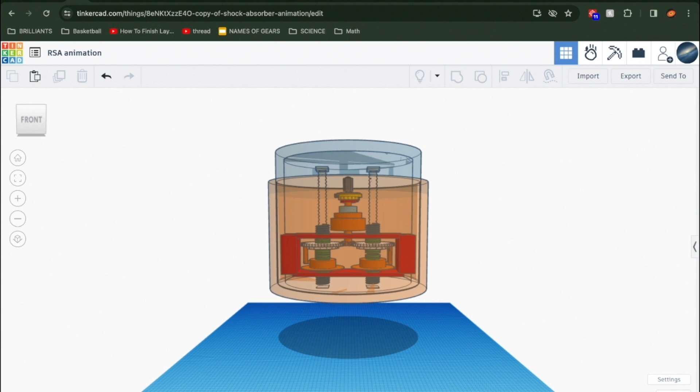Our innovation is our flywheel regenerative shock absorber to recover wasted energy in car suspension systems.

Because energy demand is expected to increase 44%, sending us into ecological overshoot, we brainstormed a couple of current things people were doing to combat this. The first thing was electric vehicles. EV vehicles are a huge combatant to the climate change issue because they decrease the amount of CO2 emitted.

However, what we wondered was why we did not see EV vehicles being driven around everywhere, and why we still saw many gas vehicles. Upon further research, we found that EV vehicles have a much lower mileage than conventional diesel vehicles, disincentivizing them for consumers.

We asked owners of electric vehicles and people without EVs what issues they found in EVs or what prevented them from buying an EV. We found that for people who already had EVs, the biggest stress was planning a route which allowed them to stop by an adequate number of charging stations. For those who had a gas car, they did not want to make the transition to an EV vehicle because of their lower mileage and lack of charging stations near them.

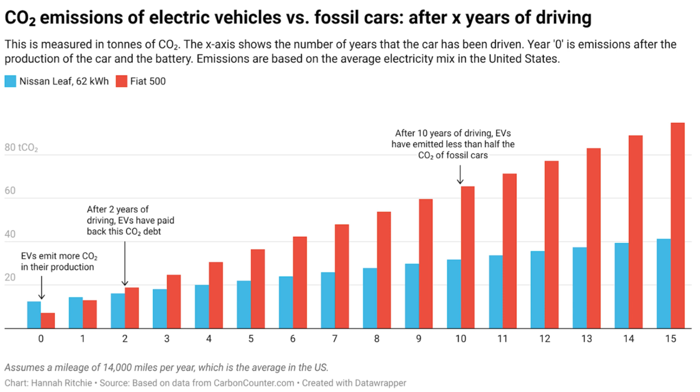In addition, we found that EVs were bad for the environment because of the amount of CO2 produced when generating the electricity for the car to run. This is of course less than the impact of gas vehicles, however, this still limits their impact on the climate change crisis. Therefore, we brainstormed ways which we could extend vehicle mileage by regenerating electricity and putting it back into the car battery, increasing the mileage of the car and incentivizing consumers, while also decreasing the need for the car to be charged so often, decreasing its CO2 output.

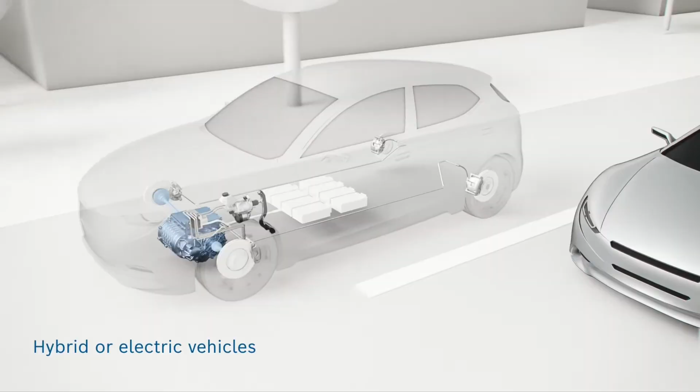The first thing we found that people have been doing was that they have employed regenerative braking to capture electricity. How regenerative braking works is it captures the energy used to stop the car and causes it to brake and transfers that into electrical energy to charge a generator to charge the battery.

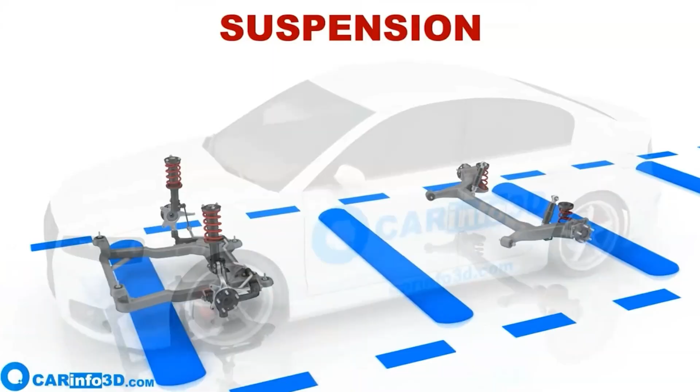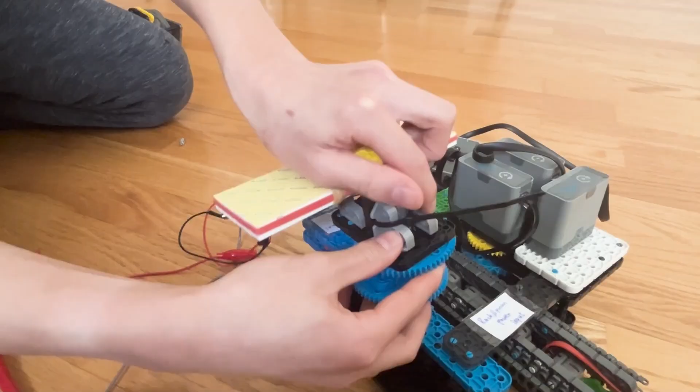Therefore, we looked at other parts of the car and noticed that the suspension system moves a lot when the vehicle is driving, allowing us to tap into that resource and be able to generate electricity. After this, we made a simple model of VexIQ pieces and tested to see what voltage we were outputting. We used a simple rack and pinion mechanism to convert the linear motion of the suspension moving up and down into rotational motion to spin the generator.

During testing, we found that the energy output was limited because of the fact that the system only generated electricity on the way down, not on the way up.

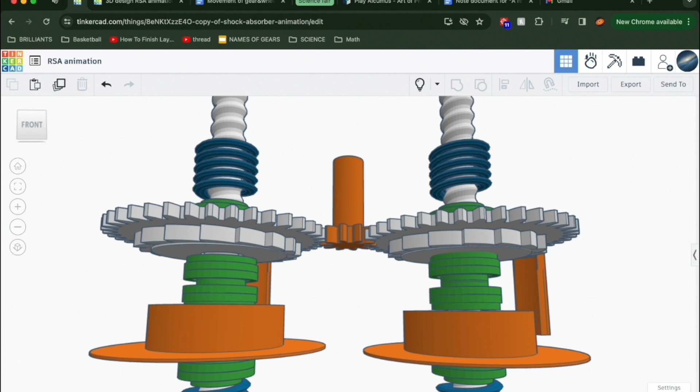Therefore, we created our novel double clutch mechanism, which generated electricity when the suspension system is compressed and when it's relieved. It uses a ratchet and pawl mechanism arranged in a certain way to allow for this to happen. When the system is compressed, the right pawl engages, spinning the system clockwise while the left pawl just clicks. However, when the system is released, the left pawl engages, spinning the system clockwise while the right pawl just clicks. Because of this, we're able to double the energy output, spinning the system clockwise when the system is compressed and released. The second thing we noticed was that when our shock absorber wasn't moving, it wasn't generating electricity.

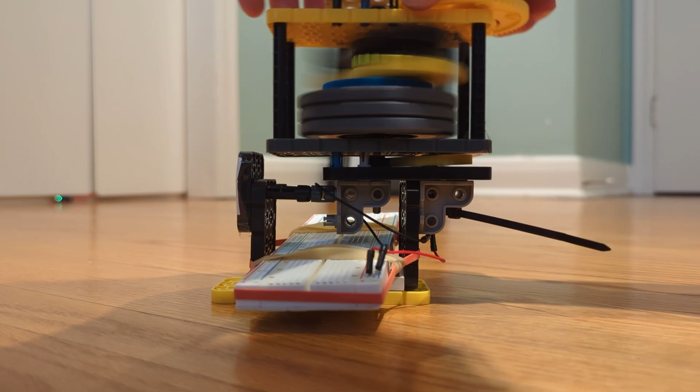We took inspiration from flywheel batteries and salad spinners and added a flywheel to continue to generate electricity even after the system was stagnant. After testing the system with no flywheel and with a flywheel, we found that the flywheel achieved almost double the amount of electricity than the non-flywheel system.

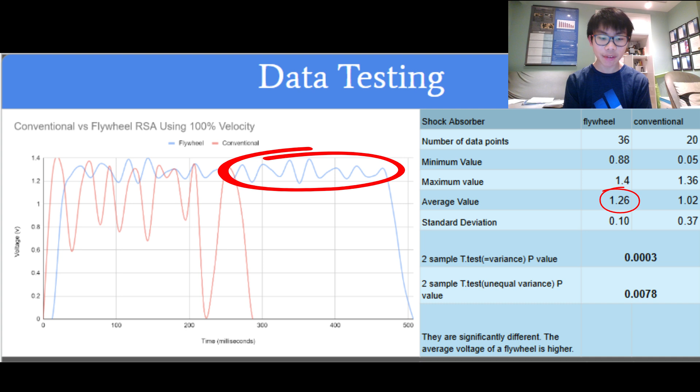We also see that the flywheel continues to generate electricity even after the system has stopped, evident in the fact that the flywheel line is longer. We see that the flywheel system has a higher average and lower standard deviation compared to the non-flywheel. This trend continues through the 80 and 60% inputs.

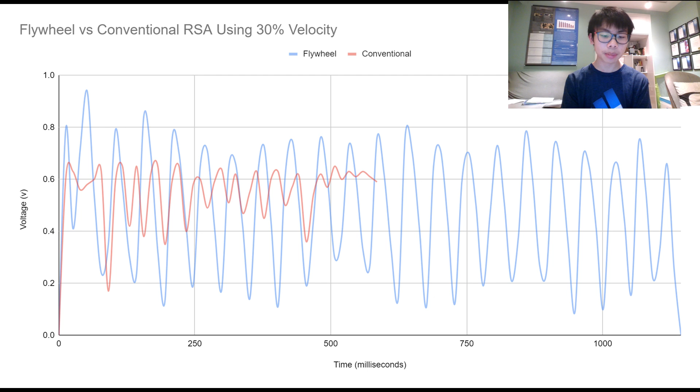However, at the end, at the 30% input, we see the trends have flipped, with the conventional system being more stable while the flywheel fluctuates. This is because there's not enough input force in order to get the huge weight of the flywheel going. What we found was that the flywheel performed much better than the conventional system when they were being spun faster, as opposed to when they were being spun slower. The sweet spot is when the system was spun between 100 to 60%. After that, the no flywheel system is better.

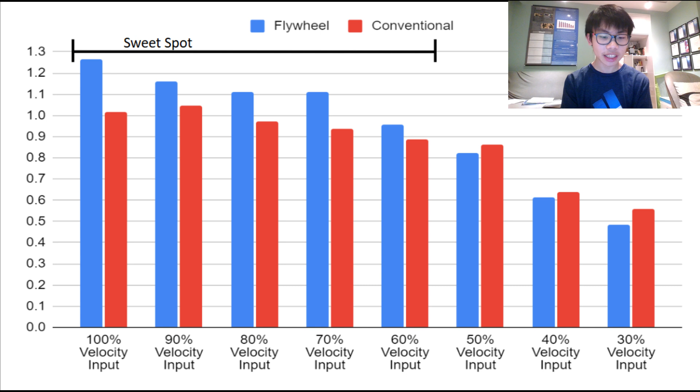Therefore, we needed to find a way to keep it in that 100 to 60% range.

Our next step was to 3D print an actual prototype which we could test further. We CAD'd our initial idea on Fusion 360 and began doing test prints. Naturally, some things did not work out, and we needed to print a lot of things. However, once we got everything to fit together, it seemed like it might work.

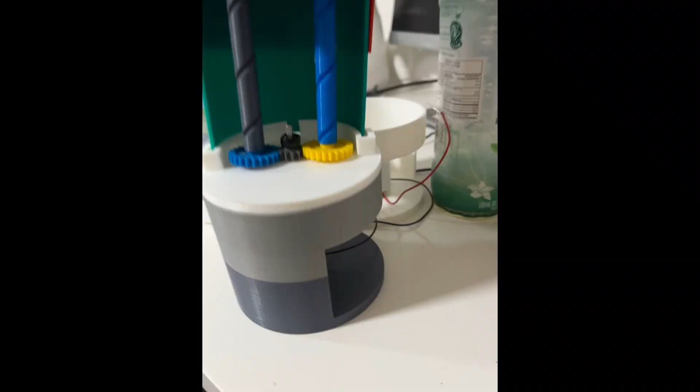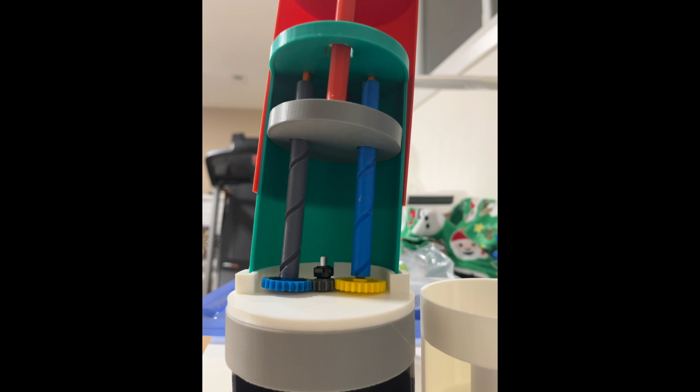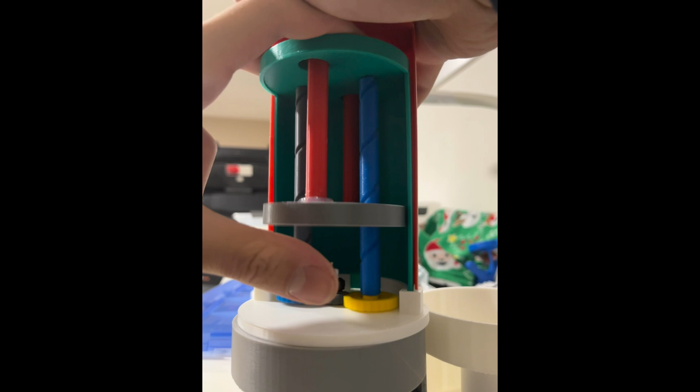You can see the generator in here. There's no flywheel. And so now this is the flywheel generator setup.

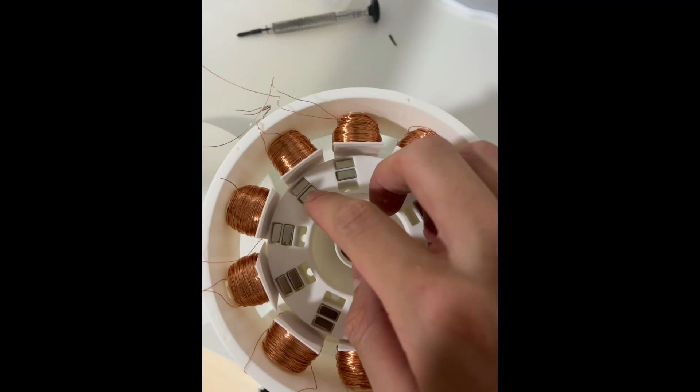So here we have copper coils all around a middle flywheel. This flywheel has magnetic slots in it. You can see there are 3 slots, I've only filled up 2. So these magnets can act as weights, and they can also interact with the electrons of the coils to produce alternating current.

And so once you spin, you're generating electricity without affecting the generator. The generator is at the bottom. So the flywheel is attached to a generator.

So this is something neat. In order to keep testing consistent and to find a way to compress and decompress the shock absorbers, we built a testing mechanism out of VEX IQ parts. Our system is powered by 8 motors, acting as the weight of the car moving up and down.

Through testing, we were able to find ways to improve our design further, like increasing the flywheel's weight and changing the pitch of the threaded rods to increase or decrease torque.

In order to conduct testing, we connected an Arduino to the system to act as a voltmeter. We then imported the data we collected to an Excel sheet, which recorded the data in real time as the system is moving. With this data, we were able to graph the energy outputs for all of the changes which we made.

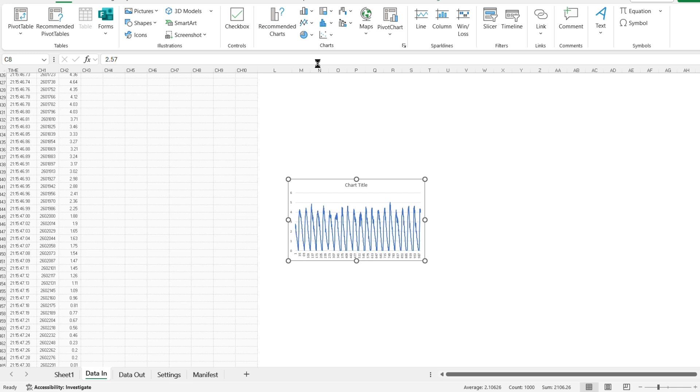We found that the average voltage output for the system with the heavy flywheel was 2.106 volts. The average voltage output for the system with the lighter flywheel was 1.725 volts. And the final average voltage, which was 1.79 volts, was with the no flywheel system.

This reinforced our point that the flywheel system works really well. We also saw that the flywheel needs to be heavy, or else it just slows the system down.

However, something else which is important, which physical testing gave us, was actually limits to the design. These limits would definitely come up again if we were to implement this.

The first thing was friction. What we found was that when we put all the parts together, the rubbing of the different moving parts created a lot of friction, decreasing the efficiency of the system. We found that we would be able to overcome this later if we added some sort of lubrication to dampen the impact of the parts moving together.

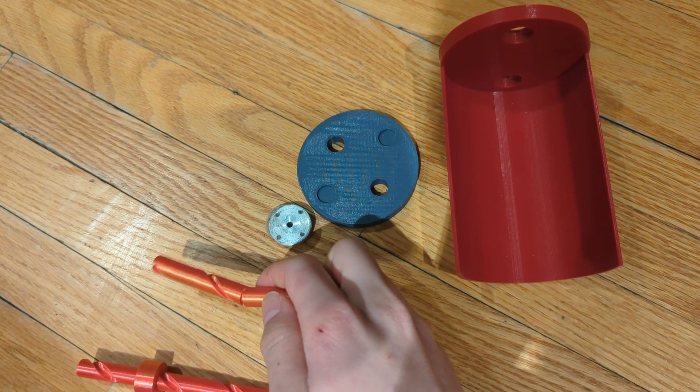The second thing which we found is the actual amount of torque and pressure which the system needs to withstand. This is evident with the number of threaded rods which we broke during testing. Both these issues will be more apparent when actually implementing the system, which we have not done yet.

Our innovation is meant to target anyone driving a car. We hope that it can boost incentive for those who do not have an EV to get an EV and improve the experience of those who already have EV cars.

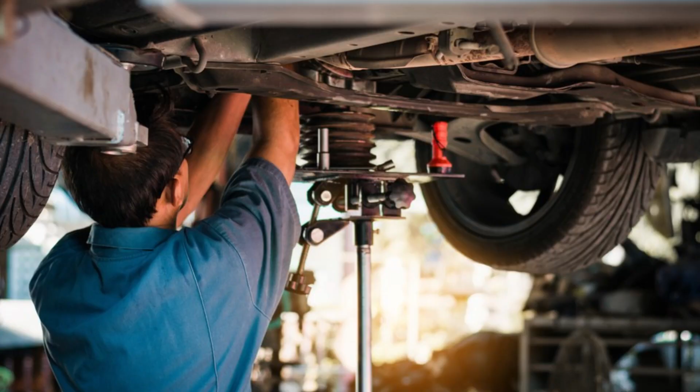We hope that the final product of the system will be able to be easily integrated on an already existing car, and the whole suspension system can be easily switched out to have our RSA implemented.

We have a couple of next steps which we want to start. The first is to refine our current design. Our current design has a lot of moving parts, and because of the expected barriers which we expect in the implementation phase, we want a 3D printed prototype, which we hope can prevent those issues before they even come up.

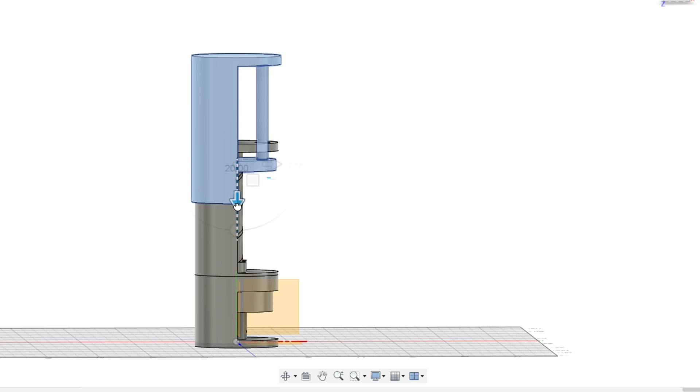If we were to win money, we would be able to buy a couple more 3D printers in order to make this process faster and allow us to test more.

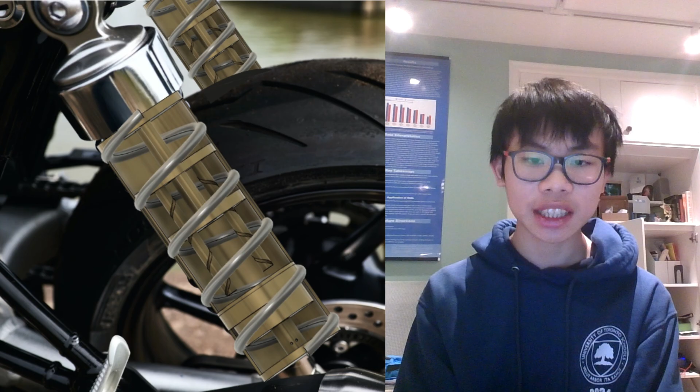After this, we hope that we can start to use more structural materials, such as metal or aluminum, in order to create a structural prototype. We want to be able to integrate this reinforced RSA onto a bike for real-world testing and allow it to face accurate levels of stress.

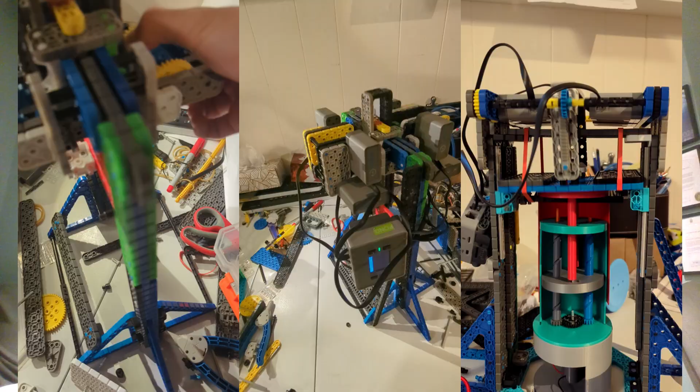Last year, our idea was simply an idea, which had a small prototype out of VEX IQ pieces. However, because of some money which we got from the Canada-Wide Science Fair, we were able to buy a 3D printer and create our first accurate prototype. With the money that the Ingenious Plus could give us, we could expand our idea further and create an even more refined prototype which we could test on vehicles with.